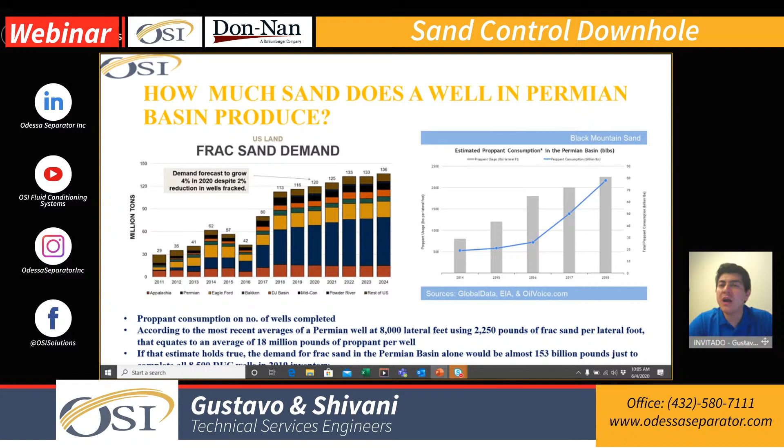But like you said, back in 2014 we used to have just 24, 28 stages. Right now in 2020, we're doing 62 stages. In some cases we're doing 72 stages. The lateral length increased, but the number of stages is also related to that proportion. What it means is more consumption of the proppant that we're using to frac those wells.

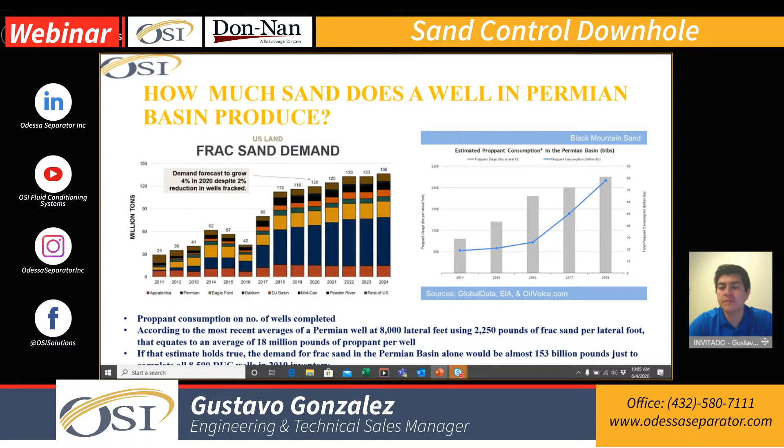Exactly. And to put that in numbers, let's see what percentage of the overall U.S. demand versus the Permian Basin we're talking about. How big is big? As big as Permian can get - we're using 37% to 40% of overall U.S. demand of proppant sand just in the Permian Basin, which is comparable to two of the other bigger basins, the Eagle Ford and Marcellus combined.

And if we were to compare that to rail cars per day, it's like we said - 68,500 tons per day, which is 600 rail cars that could be filled full of sand, used just per day. And that's just predicted to go higher. It's supposed to be 45 to 50% that the Permian Basin itself is going to use of the whole U.S. demand, which means that right now it is 68,500 tons per day, and demand going higher, it's going to be about 163,000 tons per day.

And that's what we can see with the production, where in 2018, just a couple years back, it was 2.8 million barrels per day. The oil production itself has increased to 3.8 to 4 million barrels per day. So increased production, increased technology has its cons, which is increase of proppant sand, and this sand, like Gustavo said, is not going to disappear.

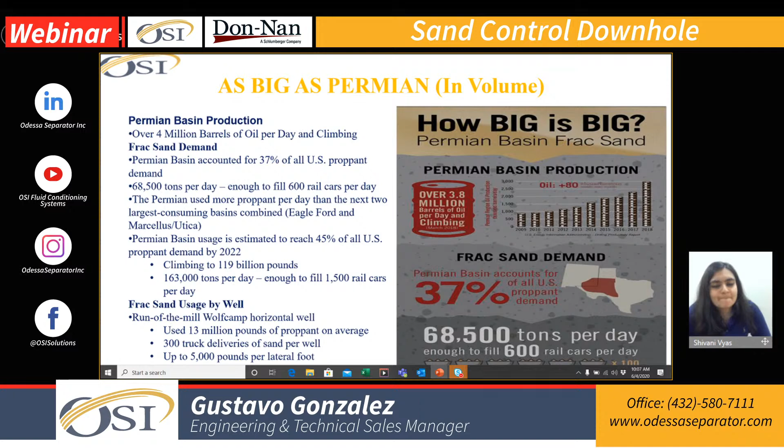One of the things I like—I know you already covered the majority of this topic, but I'm more graphic. I need to see a photo to understand a little more the severity of what we're talking about. So you mentioned everything, 600 rails is what we need, or what we're filling.

It's more like 21 million pounds of sand that we use per well, in a well that is maybe 8,000, 10,000, or 12,000 feet on the lateral. We're doing like 62 or 72 stages. So that is equal—let's say on the flow back, we're getting 30% of the sand back.

That 30% will fill 2,715 mud joints or tailpipe, whatever you want to call it, or that is equal to 84,165 feet of tubing.

So what we're saying is, with the amount of sand that we are using to inject or frack on these wells, we can fill the entire tubing for 8 wells. That is going to be the analogy—it's almost equal to 8 wells based on the proportion of what we're doing.

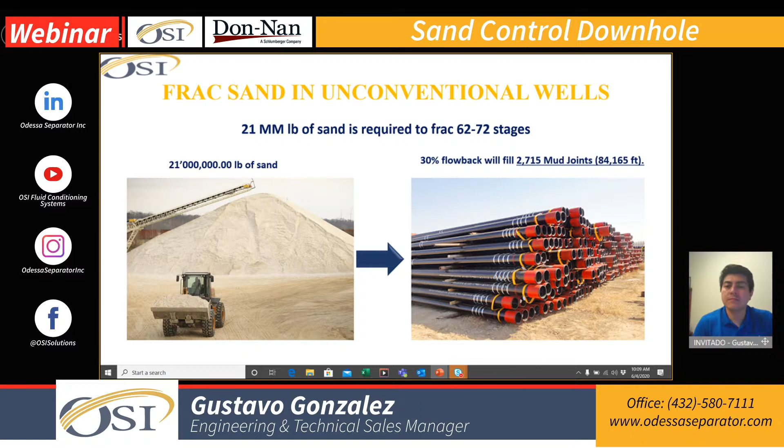Let's start from the basics. So all the sand that, let's say in this case, was already on the well because it was fracked, put in an ESP or gas lift, and we're receiving now that conversion to a rod pump—there is a portion of that sand that we need to lift to the surface.

Dealing with that is about the upstroke and downstroke: the density of the sand, or the heavy particles, are going to fall down, being located on top of your pump. What it means is every upstroke and downstroke, those particles that are smaller than the clearance—based on the design you have from your rod pump—are going to be located there, and slowly you're going to crush them back and forth, until the point that if you're shutting the well or something happened, you're getting a lot of sand on top of your pump, and it's going to be more challenging to restart.

Also, the buckling that you're going to cause in your rods—every time you're putting more weight on top of your pump, what you're doing is pulling the rods to one side, and you're changing that load effect you have in your system.

So that's something we're facing every single day in a conversion well, being able to deal with that portion of the sand and handle it prior to the ingestion of the pump. That's what we're covering today.

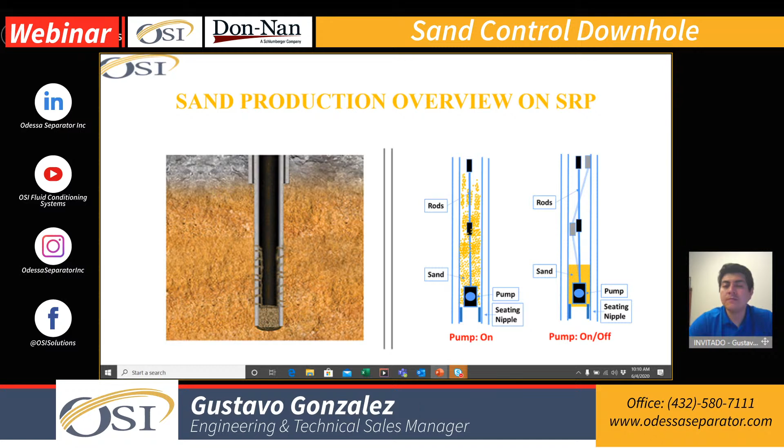Right, so let's say we have your sucker rod pump and we're operating the pump just like Gustavo said. We have the buckling, and because of these sand particles, you're going to generate friction. That friction is going to wear your rods, and it's going to wear the parts of your rod pump itself.

Is on the upstroke and downstroke because we have so much sand particle now, so that the operations of the rod pump is not optimal to what it was predicted at. And then, go ahead, Gustavo.

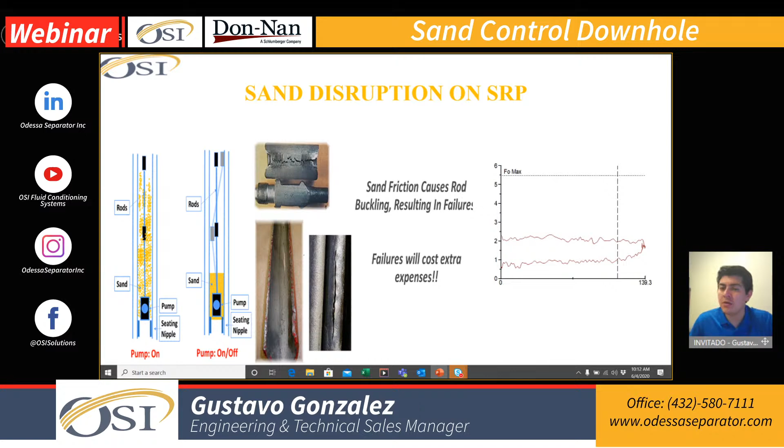One of the things Don-Nan did in one of the classes when explaining about the pump cards, one of the things you're seeing is more that friction. So all this interference you're seeing is more the friction of those sand particles located between the plunger and the barrel, just traveling up and down in your upstroke and downstroke. That's exactly what we're going to say, whenever you have that clearance and we're seeing that sand particle right in between that clearance, that's exactly where we're seeing that friction on the pump card.

Moreover, we're going to have the packing off of cages and plungers, and we always hear that the pump is stuck, the valve stuck open. All of this is going to cause a premature wear on the pump itself, just because there's so much sand particle, higher pressure, and now the production is obviously not producing yet what it's supposed to be.

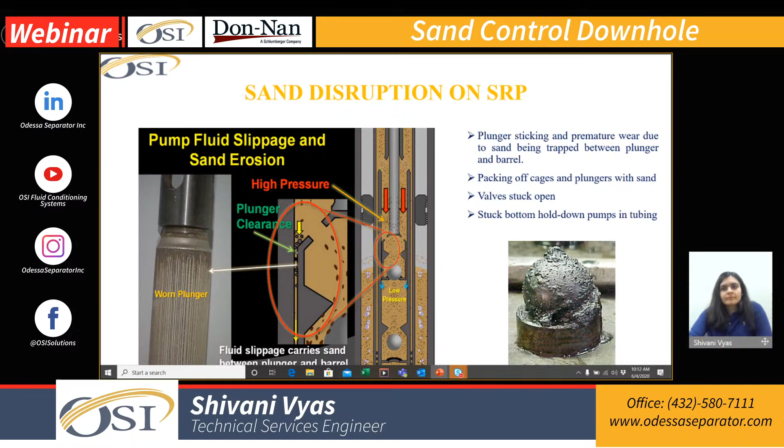One of the things I would like to cover is that they always talk about the clearance, or what will be the right clearance, that space I need between my plunger and my barrel. If I go too tight, I can cause too much friction, and if I open that space, maybe 6 thousandths of the inch, I can get too much slippage and I'm going to start losing part of my production.

So you always need to find that sweet spot, which is going to give you, based on the particle size distribution that we're going to cover later, enough space for the sand or for some of the small particles coming back to be able to flow, either using a sand diverter or something on top that might help handle that.

But you need to identify if you're having like 8 thousandths of the inch and your slippage is causing like 3 barrels per day that you're losing, that over 30 days is going to be 90 barrels. With a $37 oil price, it's almost like $3,330 that we're almost wasting every month.

That's what finding that sweet spot is going to be critical for, to avoid that worn plunger, or to avoid that plunger stuck in your barrel.

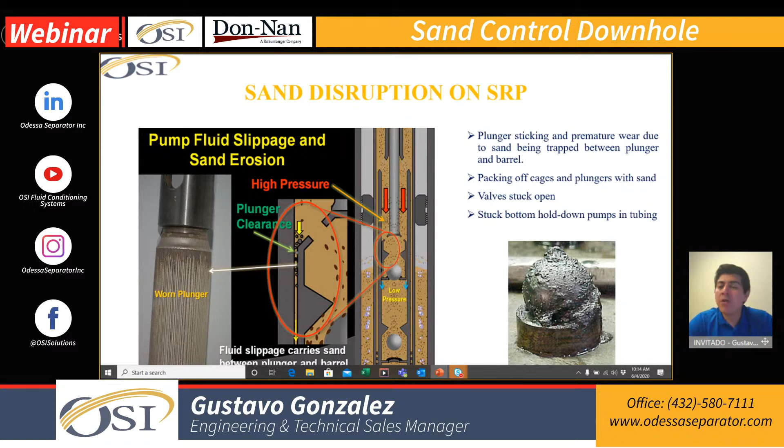One of the things we can see is there are multiple technologies currently on the market, and those are more like accessories, some part of the pump, API or non-API, that are going to help you extend that run life, and help control some of the sand particles either prior to reaching the pump or after it's traveling through the pump. So we can see different types of plungers that Don-Nan already covered in several presentations, different types of cages. We see like kind of pre-packaged screen or gravel pack.

We can see like a FARR plunger. In some areas it works, in some areas it doesn't. Same thing for the desanders and also the screens. And I know the first thing when we see a screen is something super tight, and it's going to create a concern: I'm dealing with this amount of sand, for sure I'm going to plug the screen.

So there is a methodology that we're going to cover. When you're using any of these system technologies, you need to understand a little bit of what you're facing with. And also we've got the purge valve or dump valve, something that's going to help you flush some of the sand located on the tailpipe after you start to deal with some of that treatment or previous handling part.

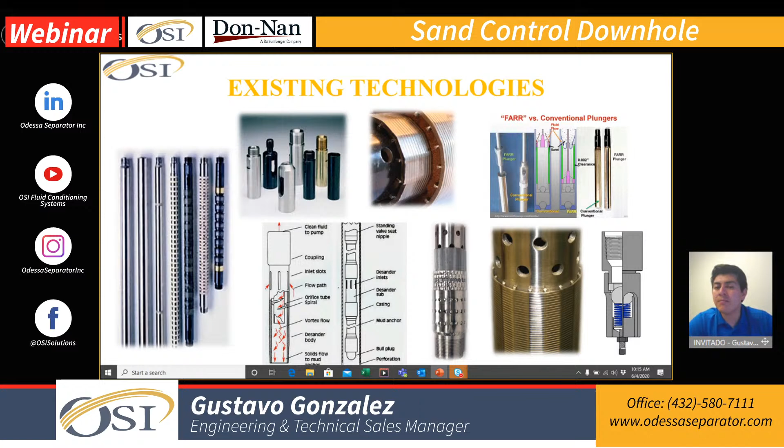And that's kind of what you guys are maybe visualizing or thinking in your mind when we discuss screens. The first thing you're going to think is it's going to plug, and for sure it will plug if you don't do the right diligence. It's the same thing with a rod pump. If you put the wrong pump in the wrong application, you're going to lose production, or you're going to face an issue either with gas interference because you're causing another problem.

Pressure drop - I know people are always concerned about the pressure drop, and yes, if you're not sizing the screen appropriately with the right length, what you're going to cause is some pressure drop. And if you have some high scale tendency, what you're going to see is some of the scale starting to build around the face of the screen.

Just to give you some numbers, a regular screen can have between 180 to 320 square inches to handle either 200 microns or 350 microns. What it means is you're going to get more open area in your screen than what you actually have in your standing valve. Based on the setup or design that you have, your standing valve is going to have either 8 square inches or 12 square inches max.

So you always get more open area on the screen, but there is a process for the fluid to go through, because through every single individual slot or window on the screen, this is how you do the filtration. This is how you're able to handle a portion of that.

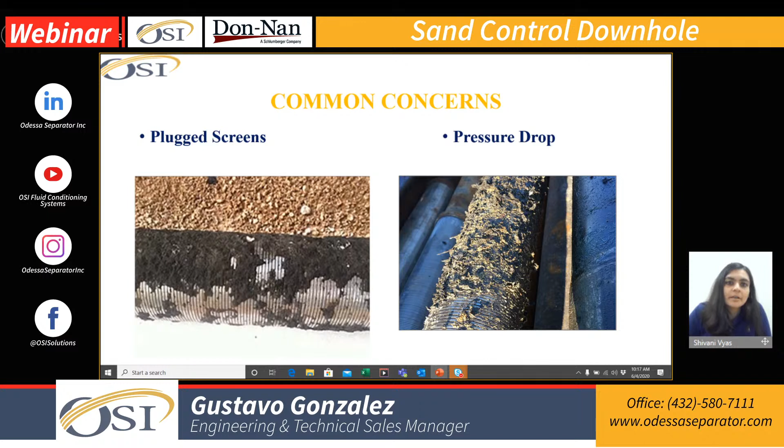And to champion what Gustavo just said is absolutely right. If we're talking about screens, the definition of screen is restriction through the fluid, right? And that's what we're doing. But how we apply that is the main deal — whenever we're applying to homogenize the fluid, we're applying to give the pump what it can handle at that point. So that's what makes it really different: the application of these screens on particular well conditions.

And applications, like Gustavo was saying, if it has paraffin and we go with the tightest slot size, we're going to plug the screen. If we want to filter out 100%, we're going to plug the screen. So just analyzing what is the right application makes the whole difference.

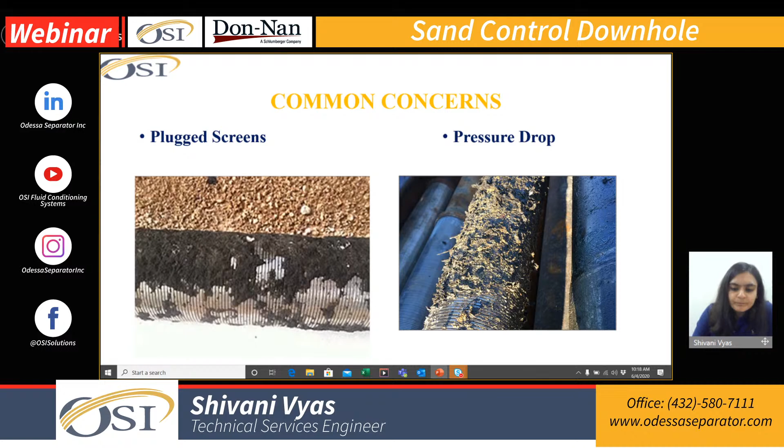And then some of the other concerns regarding sand is we're going to fill up the tailpipe as soon as possible, or as soon as it started producing. So that's something we have to address — how do we design the whole wellbore so that we're not only filling up the tailpipes, but also having some of the sand in the whole annular space.

And then another thing is erosion. We do know that with high production, we're going to create certain velocities added on with the sand coming in. So if we have such high velocities, it's going to cut your sand separator, like we can see in this picture — there's going to be a lot of sand erosion in the sand tool itself.

So these are some of the common concerns that we have to address and say what is the most optimal way to design, not only for the production, but also to have more retention time of the whole BHA.

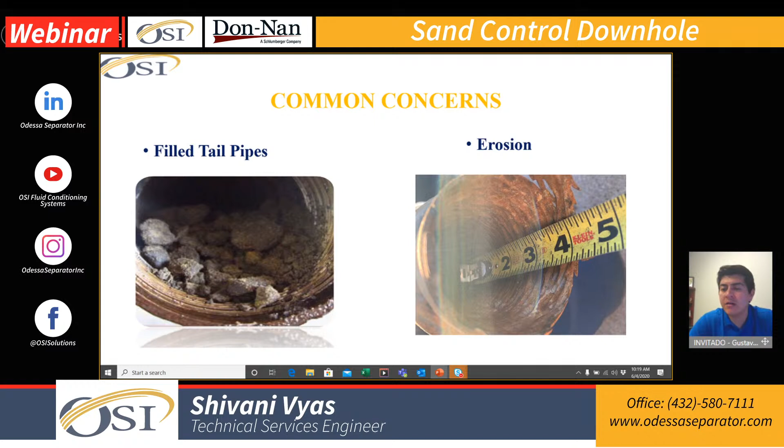And yes, like the photo mentioned on the right side, the erosion — we got one call from one of our customers in the Bakken, and he was talking about, hey, I just went with a desander, but this is what happened to my desander. The desander is designed to take all the fluid with the sand, spin the particles around the sleeve, and send some of the sand to the tailpipe.

As soon as you're filling all the tailpipe, even if you go 4 or 5 joints, if you do the volumetric calculation, filling those up is so easy. More if you get hit by a frac well, you can fill those up in less than 10 minutes. And what you're going to face now is just reaching the sand until the top section of the last tailpipe joint, and now it's too close to the helix, and what you're going to see is now all the forces spin in just one specific point, and that's where you see that erosion is more.

The desander is doing its job, creating that centrifugal force and spinning the particles, but the problem is the force or the wave that you're creating to spin the sand is not dissipating because it doesn't have any room to go. And what you're doing is just spinning in the same spot over and over, causing a sandblasting effect that's going to lead either to a fissure or to a failure, because you're going to cut that desander out.

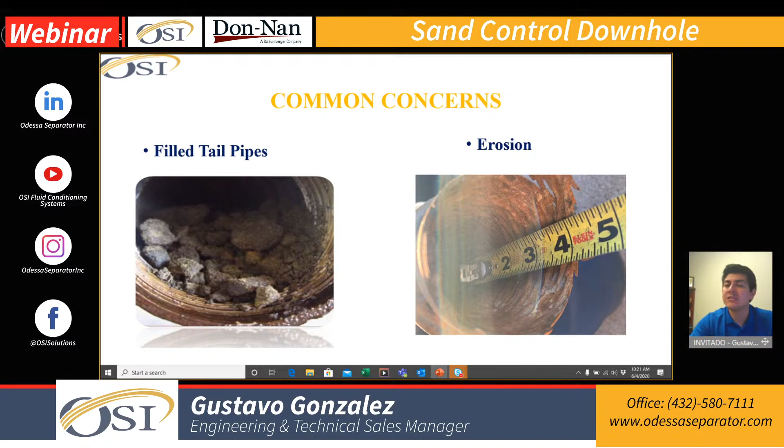And it's a common issue — we see those on ESP as well. That's what makes the design so critical for any of the accessories that we use to handle any type of sand issues.

One of the things we talk about, like criteria, is that we need to understand a little more of the mechanism or the concept for sand control.

The first thing we always tell people is you need to understand and recognize what you're dealing with. Most of the time people say, yeah, we normally use 20/40, or we use just 100 mesh with a little bit of 40/60.

Yes, that's the frac sand. Once you're fracking the well, you're almost breaking those particles, and you need to understand the particle size distribution, because all the sand you frack into the well comes back up with a bit of formation sand, and that's the sand you're going to face in your pump.

So if you can get a sample in any of the tear downs you're doing from your rod pump, try to get a sample of the sand, try to get a sample from the tailpipe. That way you can understand more about what sand is going through your system, and differentiate what's going through the tailpipe versus what's actually going through the pump and causing the plunger to get stuck in the barrel.

It's going to be a different particle size, I guarantee you that, and that's how you can start to understand how to handle it.

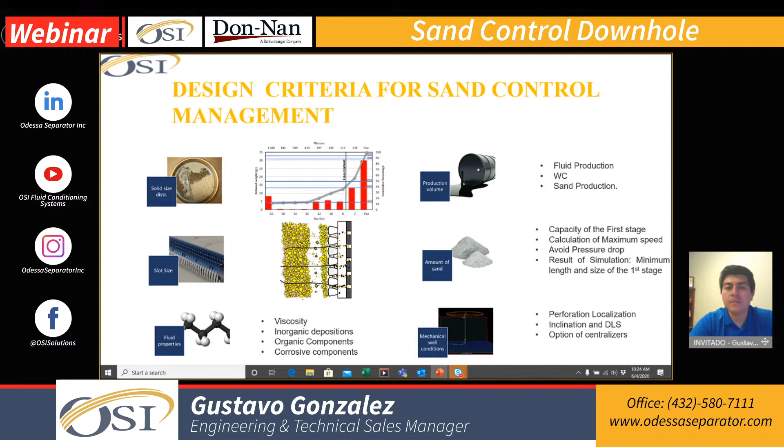Again, this 100 mesh, or 150 microns, or whatever the size is, is just the size of the particle. It doesn't mean that's the size of the particle now trapped in the oil, because it's going to almost increase 2 or 3 times that size to pass through your pump and standing valve, and then fall back and get located around your clearance.

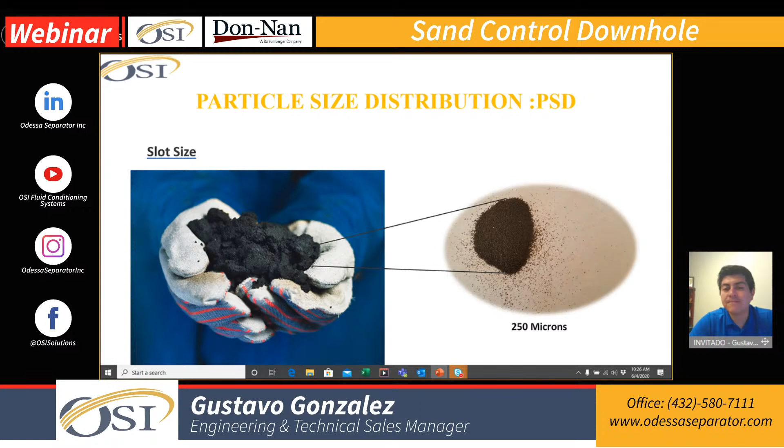So now the question comes on is, we do know that these are the sand problems, the common concerns that we're facing day to day. And now that Gustavo has gone through what is the particle size distribution and some of the concepts we need before we design the well, the question comes in: how do we effectively separate the sand?

So that's exactly it these days with more of the unconventional wells, we're not going to see sand just in what we're thinking. It's going to come in slugs. So whenever we have those sand slugs coming from the horizontals, how do we go ahead and effectively distribute this?

We call it the two-stage filtration, just so that we can homogenize the fluid. Let's go ahead and use the whole wellbore. Let's filter the bigger chunk of sand particle, and also filter the finer sand particle and dump it in the tailpipe. Then another portion would be something that the pump itself can handle. That way, we're utilizing the whole wellbore, homogenizing the fluid, and effectively distributing the sand particle.

So to do this, in the first stage, we have the sand screen, which is a V-wired screen. If we can see right here, the screens are in the shape of a V screen, and the space in between each wire wrap is the slot size that we're seeing. Externally, we're going to definitely get that particular sand filtration. Internally, the open area is 2.5 times the open area of the conventional screens that are used.

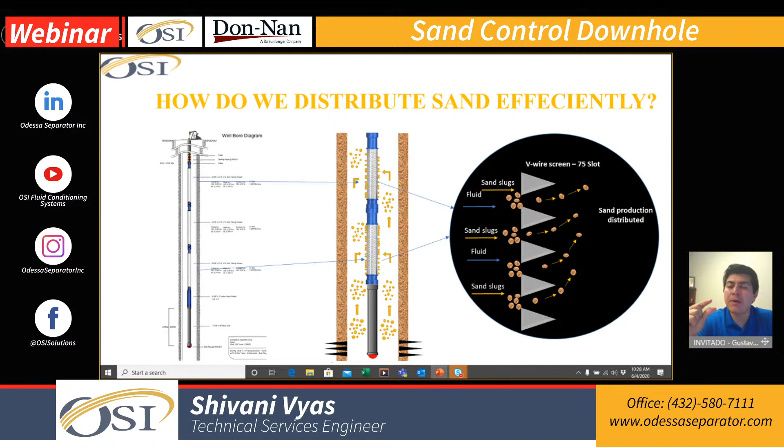So just to be sure, let's revisualize the photo that we saw before. If you see on the photo on the right side, where Shivani was talking about the screen, the V-wire, and the V shape, you can see several particles of sand agglutinated. When the sand is going through the screen, mixing with the fluid, what you're going to see at that point is more a coalescent effect, and some of the particles are going to start hitting that screen jacket back and forth, back and forth, until you're breaking part of that agglutination of those chunks, and particle by particle will start to go through the system.

So what you're doing is not like all the sand is falling back to the rat hole or the lateral section. That is not going to happen. A big portion of the sand is just going to keep suspended in the fluid, coming back and forth through the screen jacket. So the main deal with the screen or the homogenization process is more about delaying the time.

If you don't have anything, and let's say you just go with your rod pump, open tubing, what you're going to see is all the sand, the whole chunk, is going to go through the standing valve at the same time. In this case, what you're doing is slowly breaking that agglutination and allowing just small batches of sand to go through the system, a minor portion. So instead of dealing with 100% of the sand at once, you maybe are just facing 5%, 10%, and you're delaying the process.

You're not dealing with everything immediately, and that's what can cause an issue. A rod pump can handle the sand, but if you try to get all the sand at once, you're going to plug either a rod pump or an ESP.

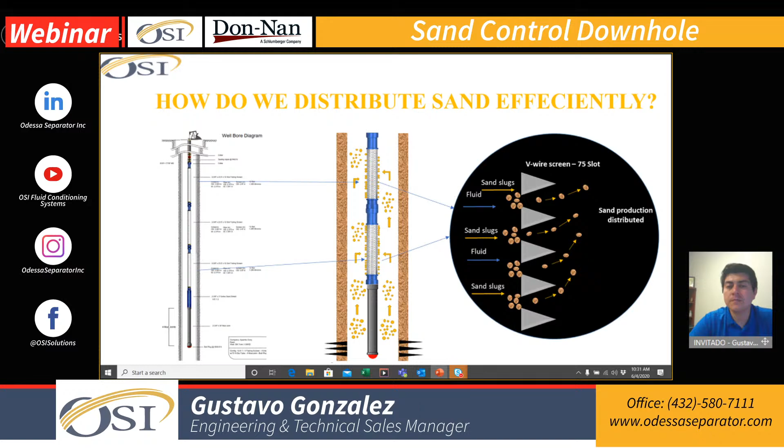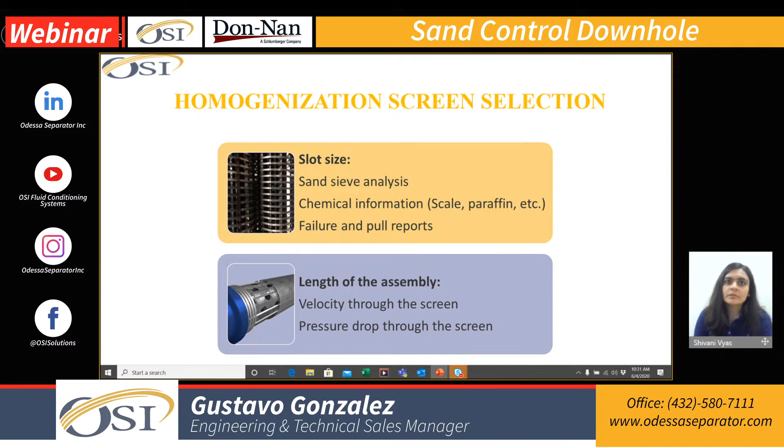And how it behaves when it's going through the screen or any filtration media that you have to handle prior to going through your pump. That's exactly what is important here, after doing the sand sieve analysis, where we can see what is the particle size distribution of the dry sand, and taking into consideration the well conditions. What is the deviation? Does it have any scale issues, paraffin issues? How many interventions has the well had? Depending on that, we go ahead and select a slot size to efficiently filter out, but also to efficiently apply at that particular well condition.

And then that would also come into play with the length of the tool, depending on what is the production, what is the water cut we're talking about, what is the oil viscosity. Here in the Permian Basin versus Bakken, we're talking about two different things. So the slot size here versus there would be completely a game changer. So all those things matter.

And one most important thing is the pressure drop, something we always talk about, so critical to go ahead and analyze with the well conditions, what are the pressure drops that we analyze before we go ahead and do the homogenization of the screens.

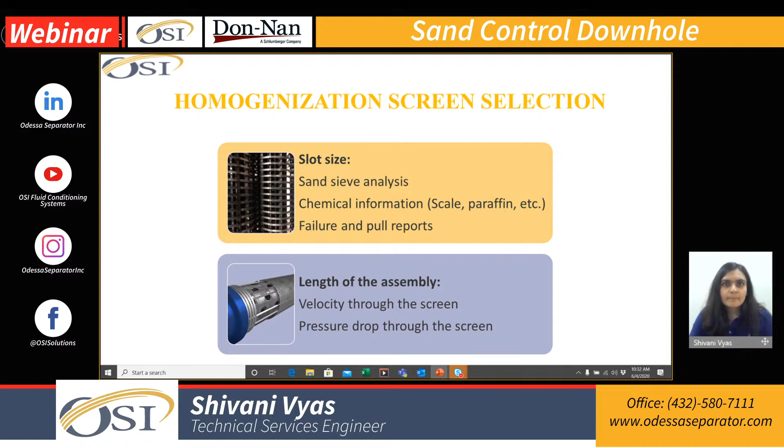And one of the things we see about that concept is, again, we need to go with calculation. We need to run some numbers to be sure that you're not prematurely plugging the screen, and either way, you're not going to cause any erosion or damage on the outside jacket of the screen to destroy that system.

So based on the production, what you're going to determine is the particle velocity for the fluid as well as the sand. Having that in consideration, we get a correlation based on the API, viscosity, water cut, and the amount of fluid traveling through the system, and how much of that agglutination, or that percentage of sand, is going to maintain more in the fluid, and how much you need to be able to break that out.

So in this case, we see just a quick example of 400 barrels per day, and the pump is operating 100% of the time. Why is runtime an important factor? It's not the same thing, even splitting those 400 barrels per day a little more evenly, versus my well just operating 50% of the time and producing that 400 barrels per day.

What I'm going to see in the upstroke is the drawdown is going to be much higher, and I'm going to face more force, or more drawdown, going through the screen, through the system. What that's going to cause is an increase in velocity. So that's why we try to keep those numbers based on the opening of the screen below that limit, to be able to avoid plugging.

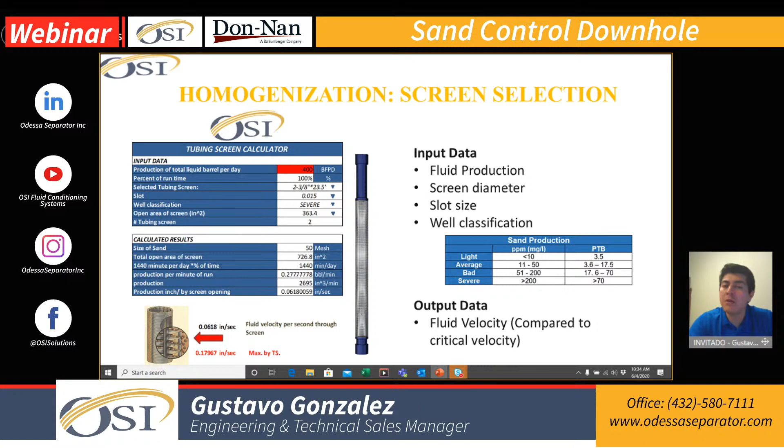Try to force that fluid to start going through multiple windows or multiple doors. In that case, you are spreading out that pressure drop, and we try to keep everything below 1 psi. That way, you are not creating any high delta P that can cause scale to build up, and at the same time, you are allowing all the sand particles to go through. That is part of the calculation we do based on the same concept: the length of the screen, the opening you get, and the percentage of total fluid, water cut, API, everything we discussed before, how much pressure drop I am causing through the system.

In this case, for 682 barrels per day, 80% water cut, and an API around 41, more like Permian, we can see that with 48 feet, meaning 2 sand screens, you're going to get 0.09 psi of pressure drop. That's nothing. The point where you're going to see more pressure drop is normally your standing valve, because that's where I'm combining all the fluid sent through the screen and everything now through my pump. That's where we normally see higher pressure drops.

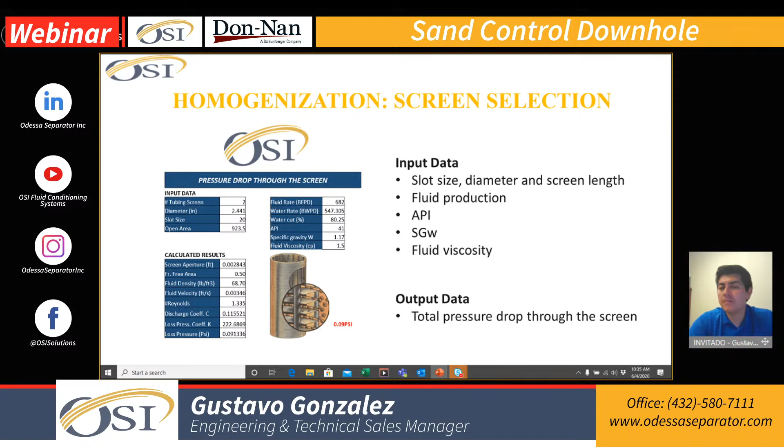And depending on the failure rates - let's say failure rates less than 3 months, or between 3 and 6 months, or greater than 6 months - that determines the factor of what slot size is needed, as well as the particle size distribution.

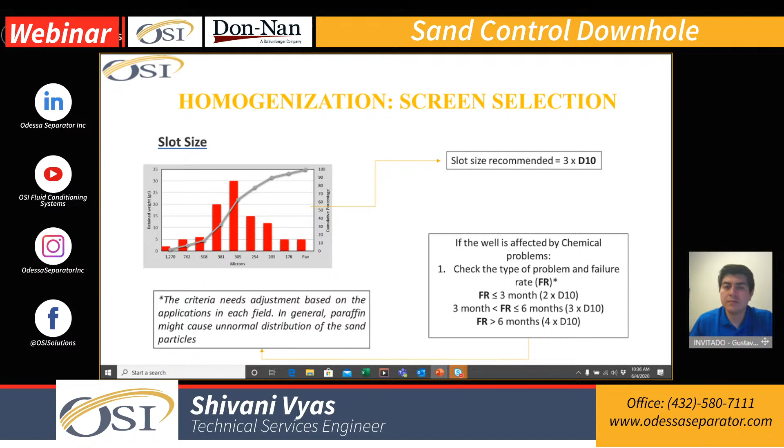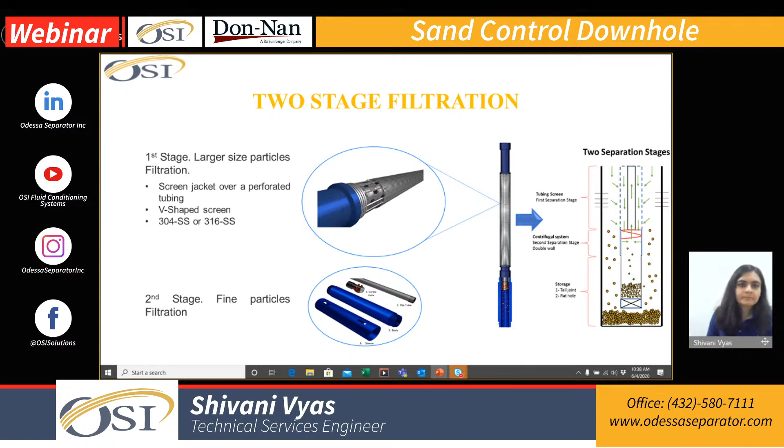So this is more like an overview bringing everything together about the two stages versus one stage. If you've been getting some bad luck with just a regular desander, consider that what you're doing is taking all the sand in your wellbore and dumping everything inside the tailpipe. That's sometimes why you get frustrated, feeling like you're filling the tailpipe too fast and need to do something different. Regardless of what you do, you go back to the same thing - it's more like deja vu, doing the same thing over and over.

If you use the two-stage filtration, the benefit is that instead of filling all the tailpipe at once, or say in 3 months, you're now selecting which particles you want to go through the screen and the system, which particles you want to spin out and locate in the tailpipe, and which particles you want to send through the pump.

Just to put some numbers on it, in a well producing 100 mesh and some 40-60 mesh, with the two-stage filtration you can see around 40% of the filtration happening with the primary stage, just the sand screen. You get another 40% just going through the tailpipe with the desander or the Vortex, and you get 20% or 10%, based on how you size everything, just going through the pump.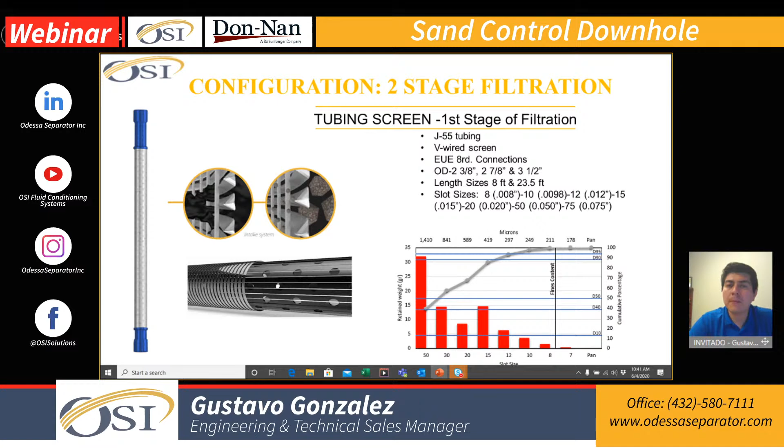And then obviously the second stage is your vortex sand shield. Again, depending on the particle size distribution, especially the frac sand size that we're using these days, 100 mesh or 40-70 combination, this is where the centrifugal force comes into play and goes ahead and generates that force to go ahead and distribute the sand particle into the tailpipe. But the combination of the first stage and the second stage, where we have a particle size distribution of bigger slot size or microns, and then the finer slot size or microns, is where a combination would be most effective.

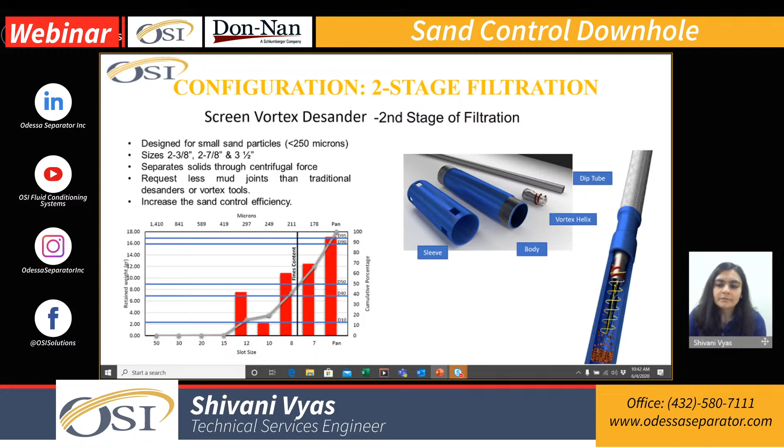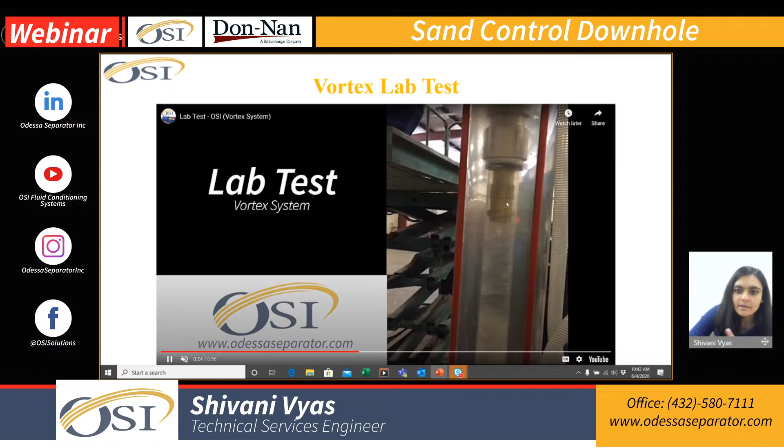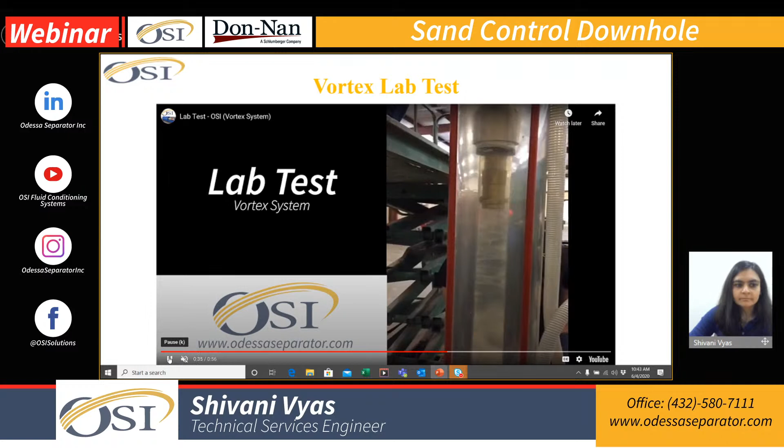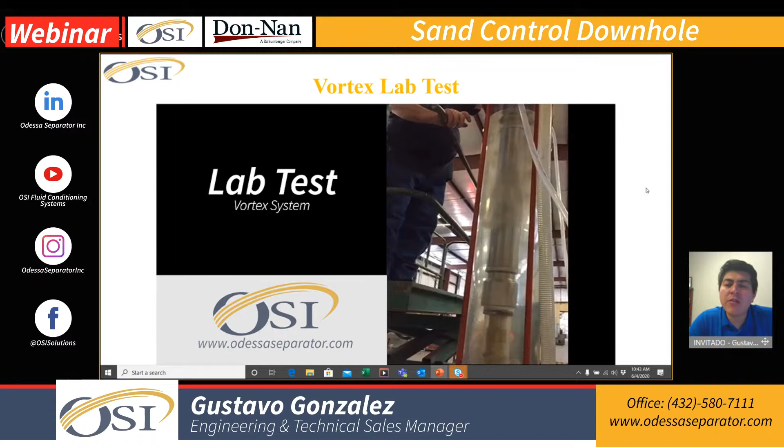This reminded me, about 3 months ago, we got a call from one of our operators who used to have one of those systems in the ground. In one of the wells he normally had a 912 pumping unit, and he operated normally a 168 stroke length, and everything was working perfect, everything was fine. After that, in some of the new wells, he was doing some rotaflex, and he said, hey, one of the things that I don't see is, regardless that it's producing the same thing, I don't see that higher efficiency on the filtration, and I don't think that fluid is creating that, or that helix is creating that centrifugal force enough to be able to keep some particles in the tailpipe.

So we were just talking back and forth, and we said, from the beginning, if you're changing your pumping unit, we need to understand the difference between just a conventional pumping unit versus a rotaflex. The drawdown that you're generating is going to be higher due to the long stroke length that you're using, and that's going to change the dynamic. In cases like that, what you need to do is just downsize that helix. We always give you some ranges that you guys can play with, but in cases like that, you need to go one size under, just to be able that you're creating a little more centrifugal force and closing a little more the vanes on the helix to be able to generate the force that is required to spin the particles. And just changes like that is going to give you the efficiency that you guys are looking for.

And that's the same thing, either it's a basic desander or it's something in combination. You need to play with the conditions of the well, plus look at the well for the entire system. What is the pumping speed that I have, the stroke length, type of pumping unit, that is going to determine any sand control method or gas separation method to be efficient enough to handle what you guys are expecting for.

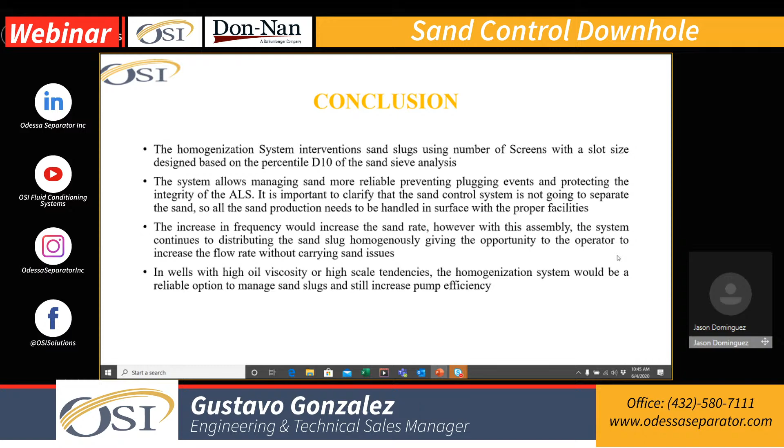I'm sure there may be some folks out there, and I know Tom Bill's on the line too. Anytime, at least for people working with pumps, we get the feeling there are numerous ways to try to combat downhole solids and downhole gas, and all kinds of options out there. For any of the operators out there, some of these people are in California, some in Canada, everybody's dealing with different wells. Where would you say, in certain well conditions or regions, you really find success more times than not? Not to say you don't find success elsewhere, but where's a good sweet spot where you feel like these screens and your double filtration really come through in the clutch?

It will be more related to how much information we can get. Let's say on the Permian Basin, understanding frac sand and those conditions gives you the right opportunity. Doing the right filtration with the light oil we have is so easy, it's so easy to filter those particles. I'd say the best success we get is either Permian or Delaware Basin, because it's so easy to deal with the sand based on the viscosity of the oil.

It doesn't mean you can't deal with heavy oil, and we have customers in California, but the challenges or the dynamic you need to apply for that filtration is going to be a little different. In cases like that, we don't try to use the combination of the two stages. If you get a lot of heavy oil, we try to just open the gap of the screen, go like 125, super big, and the only thing you want is to handle the bigger chunks causing issues when fluid passes through, because it's more like peanut butter going through the screen. It's so viscous that any sand can cause issues in your rod pump. So that's what we try to do. It's a different dynamic, not filtration anymore - it's more homogenizing the fluid prior to ingestion into the system.